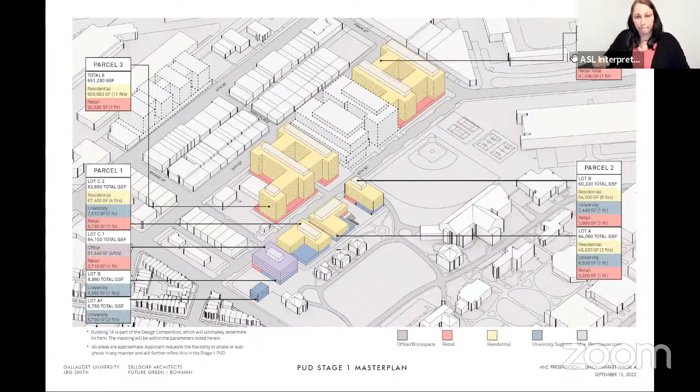There we go, perfect. So I just wanted to quickly remind everyone of all the community benefits and amenities package that was approved as part of our stage 1 PUD with full OP and ANC support. It's a pretty long list, so we'll just stick to the highlights. First and foremost, in terms of neighborhood development, the uses and benefits we're proposing for our project are all net new to the site and neighborhood.

We'll be providing approximately 60 units of affordable housing as part of the project, and the majority of those units are all at the 50% MFI level. We have executed a first source agreement with DOES, which will prioritize hiring local DC residents as part of the construction process. We have about 10,000 square feet of retail dedicated to the makerspace at a discount market rent, and additionally we'll have 5,000 square feet of retail dedicated to deaf or hard of hearing entrepreneurs.

One of the really big goals of the project is to enhance pedestrian safety along 6th Street. We'll do this by narrowing the right-of-way to slow traffic, installing a protected bike lane, and installing a tabletop crossing at Neal. Additionally, we'll provide about 65,000 square feet of open space, which will greatly improve the 6th Street experience, and in conjunction with DDOT we're going to help with traffic mitigation by installing new signaling and new traffic cameras.

Both our open space and streetscape improvements recently obtained second stage PUD approvals and are set to start construction in the new year. And then finally, as it relates to sustainability, our project will be LEED certified.

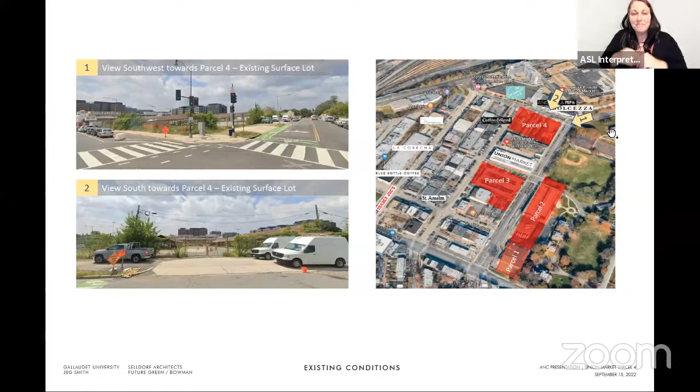Both Robbie and Nick had already spoken to the site context and where we are located. I think the unique attributes of our site relate to the context. We're bordered along one side by 5th Street, the historic wholesale retail spine, and on the opposite side, 6th Street, by the campus of Gallaudet University and Brentwood Hamilton Park — two very different sides of our site. We're located at the top of the hill of the Union Market District, along Penn Street.

The site, due to its location, has a large 15-foot plus change in elevation from Penn Street down south to the bottom of our site. So we'll show you how we've taken advantage of that in section.

Looking at some of our original massing ideas for the site, and how we refined the massing from what you saw earlier at the Stage 1 PUD — we oriented the bulk of our massing on an east-west axis along the site, working with the topography and also having the majority of units face south, optimizing for energy performance.

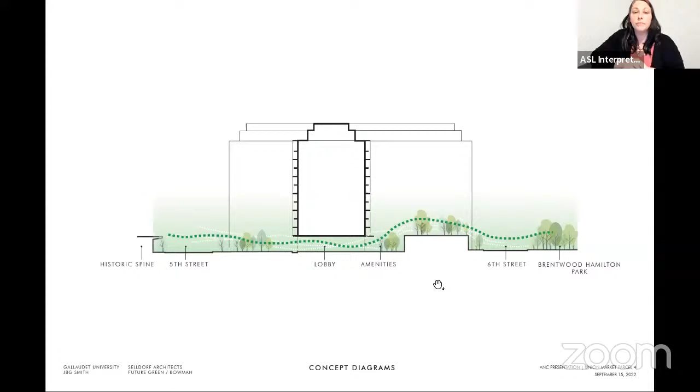Just to get back to the change in lot occupancy, the courtyard was not included in our stage 1. That's an example of some of the design refinement that we think benefits both the building and the public experience, a result of refinement over time. So the lot occupancy reduced with the introduction of the courtyard.

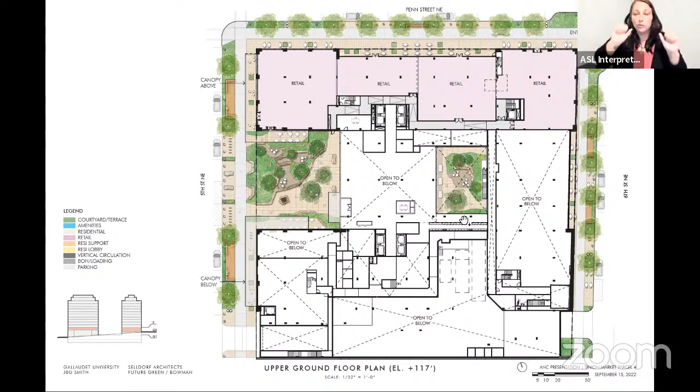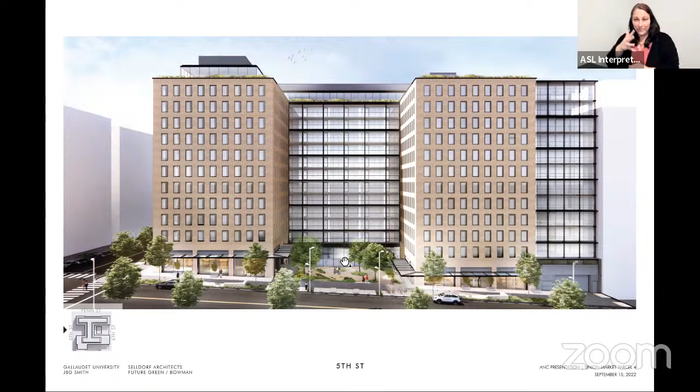So here we're hovering a little bit above, across the street from us on 5th Street, looking at the building directly. You can see here the entry plaza that I pointed out, the retail along 5th Street. We are introducing glazed and steel canopies, much inspired by the canopies across the street, that will run along 5th Street and wrap into the entry plaza. You can see here the lobby in the distance.

I think this view really sums up the massing, but also the articulation of materiality of the building to break down the massing. The building is made up of brick buildings with punched windows on essentially the corners of the site, connected with these more transparent glass and steel balconied facades.

I want to point out that this is not a curtain glazed, simple, straightforward glass facade. This is a layered facade that will start with very thin steel round columns that hold up the balconies. There will be railings and then a setback for the balconies of about 4 to 5 feet, and behind that, there'll be windows and doors for each of the apartment units.

You can see that here with this bridge building that bridges over the lobby and the sunken court on the other side. And also on the right-hand side, this infill building that sits over the parking entry.

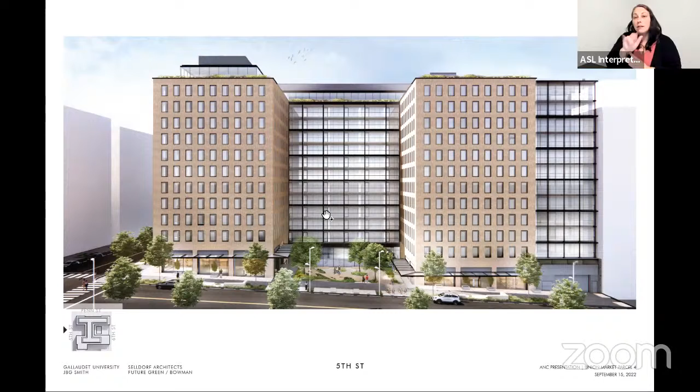We think using brick is contextual here with what we see in this post-industrial neighborhood and also on the campus. It's a material we like using, as you can see in other projects. The texture and longevity of the material is what we like, and also that it's contextual here. The punched openings in our building will be finely detailed with metal surrounds and metal sills, and the windows will be set back.

So there is relief in the shadow—it'll show shadow in the brick facade. We're in schematic design now, so we still have time to develop those details, but we've spent a lot of time on the details around the windows, the way the brick is laid, the selection of the brick, and how the brick terminates at the retail level and at the top of the building.

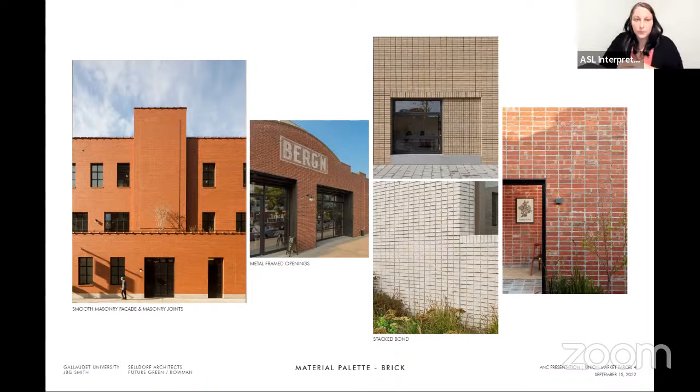Here are more buildings, in particular brick buildings, used in a contemporary way, and how we've articulated the openings around with the metal trim. We're very interested in using the brick in a unique pattern, which we're still exploring. We're excited to use a tan colored brick, maybe staying away from red brick, doing something unique and juxtaposing it with the darker metal window surrounds, window frames, and window sill details.

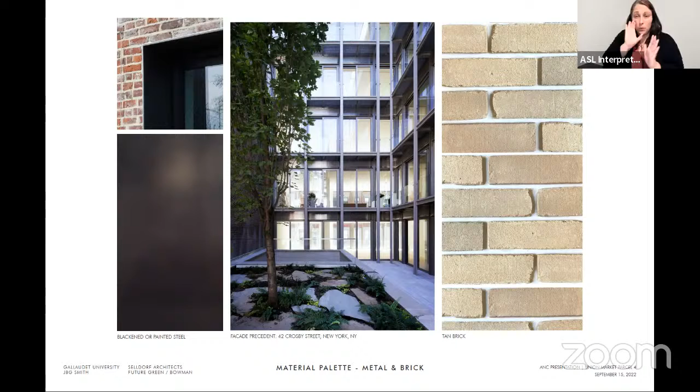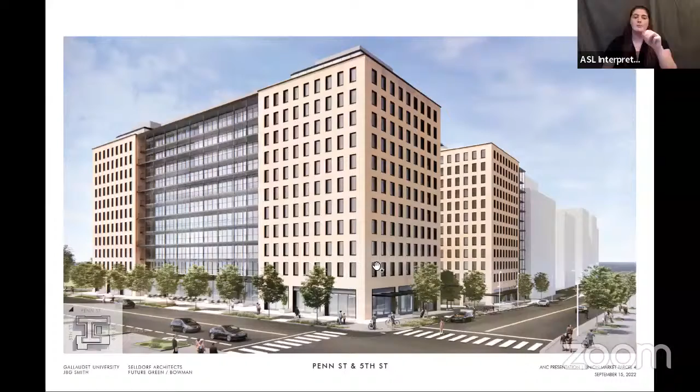The masonry is on the corners here, and to your point, maybe you're referring to this view—the masonry does wrap in all the way, a little deeper, when you go into this court here, and then the glass shows up again in the back, which is the opposite side of the glass you see from 5th Street. Does that help? Yeah, and that in a sense would extend to either side, and then you see it coming through on Penn. On this side we have that other glass infill building, and that wraps around. Yes, exactly. Thank you.

Shall we continue and jump into the landscape portion, or were there other questions? I have one more question.

Of course—the depth of the balconies. There's a new 3-story condo building next to mine with a balcony/fire escape egress at the back that's not very deep, maybe 4 feet, and I often wish it were deeper so it could be used as more living space. I have a 10-foot deep porch at the back of my house and we hang out there all the time—it's nice. Is there a zoning or technical restriction that prevents making those balconies slightly deeper, like 6 feet? I know you're going for a cleaner look and maybe don't want them extending too far out, but are there zoning or technical restrictions?

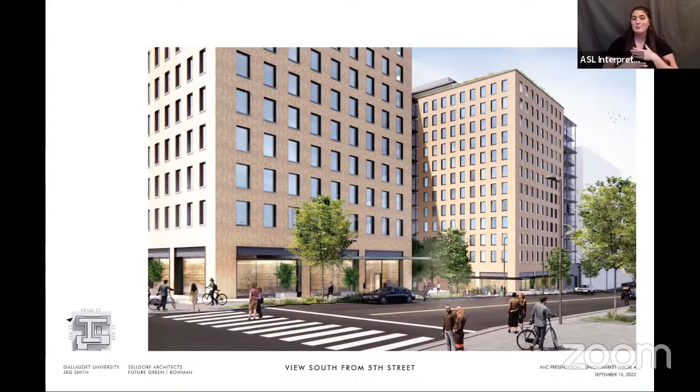I appreciate the answer, thank you so much. And I appreciate the context about how if you made them really deep, all you're doing is killing the light for the units below. I hadn't thought about that, but I appreciate that. Unless it becomes a terrace building, but if it's cantilevering over 10 feet, it will really darken the living rooms or bedrooms below, right? Yep.

I have a question real quick. The units with the balconies, so everyone won't have a balcony, it's just those that are set in with the glass. Are those the only units with balconies? That's correct, yes.

I know we had a discussion about this before, as far as the size of the units. Are the IZ units and the other units, market rate I guess if that's what you want to call them, are they all the same? Is there any difference in the size of those units compared to the regular units?

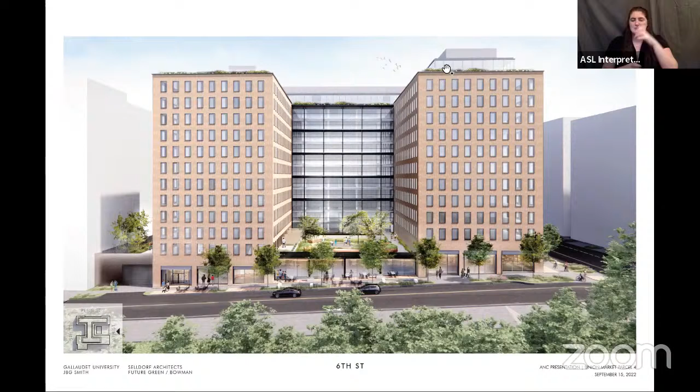Yeah, so the IZ units will have a similar distribution in terms of size and balconies as well. In addition to balconies, there are quite a few terrace units. You can actually see some here on the second floor terrace and at the penthouse. I don't want to misquote, but I think we're very high relative to most of our other developments in terms of private outdoor space for tenants. The IZ units will reflect that same ratio as market rate units, both in size and outdoor access.

Okay. Commissioner Rhodes: I will say I was actually happy to see one of the case exhibits give a map of the entire building indicating where every single IZ unit is located. I'll applaud them for doing that, because often we're asked just to accept a number without knowing, are you just shoving all the IZ units into the basement? They're actually showing, floor by floor, where the IZ units will be located, and I appreciate that.

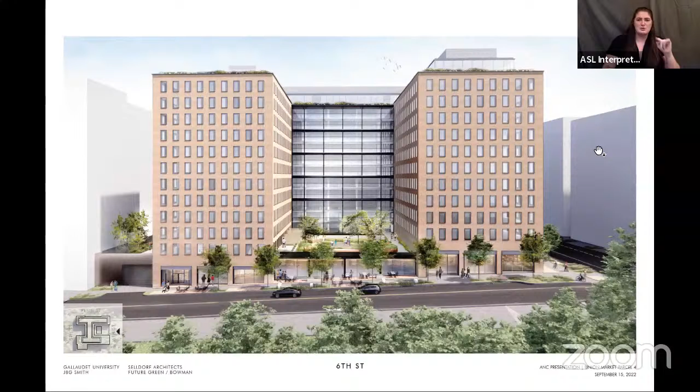Now, a question for the development team: does that then become fixed? After your second stage PUD is approved, can you afterwards change where those go? Technically, yes, because we have flexibility to move around partitions as design continues. However, the reviewer still will hold us to having the same ratio as the market rate units in terms of size, mix, and outdoor access. The interiors will be indistinguishable between the two types of units. We still have to pass all those check marks to get through the IZ program and be permitted.

Gotcha. And just to chime in, even though you can adjust the exact locations of the units during permitting, under IZ you can't put them wherever you want. You can't cram them all into one corner. They have to be evenly distributed across the building, and the zoning reviewer does look at that very closely. You can't just stick them all in one spot.

Great. Not that we would do that anyways. I hope not. You're protected.

Well, thanks for that clarification.

Sure, okay David, we'll let you take landscape. This is actually really great. I love the landscape of this project and how it's developed. Thanks, Robbie.

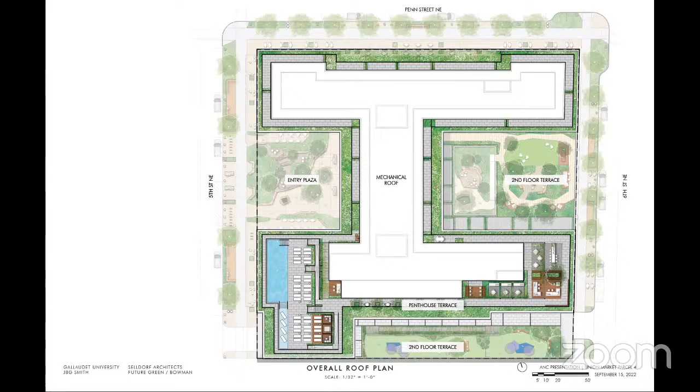Yeah, no, it's a good point. I'm afraid it might become largely ramp in that whole space, but it's certainly something we could look at and see if it's feasible. What I was thinking is it looks like you had that sort of trapezoidal thing in the lower part - if you wrapped it around there, coming down around this little thing here, and had a gradual ramp with exits off, you would probably have enough space to wrap it up. Do you get what I'm getting at? Yeah, I would have to study it to see if it's feasible. To be honest Skip, I love your intention, but it seems like it would be a real challenge to accomplish a ramp, but certainly something we could look at.

Yeah, I'm conscious of that - what I do for a living is accessibility related stuff. Absolutely, so I'm just throwing that out there as something to look into. Absolutely, I think it would be a nice thing for the people using the space, or you have people with baby strollers.

Sure, David and Skip, as somebody who has a new addition to my life, and I'm constantly - is that Skip speaking? I'm sorry. It was. Go ahead, I'm done. It was, yes.

Sorry, I couldn't see who was speaking on the screen, so I wanted to make sure I was addressing you correctly.

The floor to floor height change there is almost 20 feet, so it's a significant amount of ramp that would be required. What isn't shown in the landscape plan are the intermediary plans and the proximity of how close the elevators are, right here, and then we have entrances and exits right onto the terraces. Not to say David's team isn't creative in how they can address landscape, and we should look at it, but I wanted to put that 20-foot, 19-foot figure out to you, because I think you'll understand what that means.

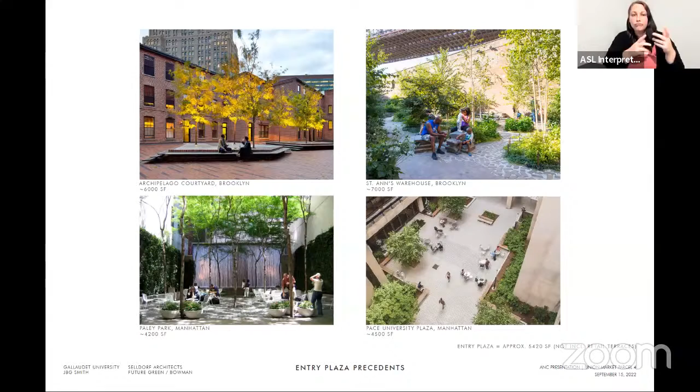And with the next slide, Oliver, we've been working on this project for over 7 years, and back in 2015 we distilled the Gallaudet DeafSpace Design Guidelines into a series of working guidelines for ourselves as we approach the public space. These are still very present in our mind as we're considering the public realm.

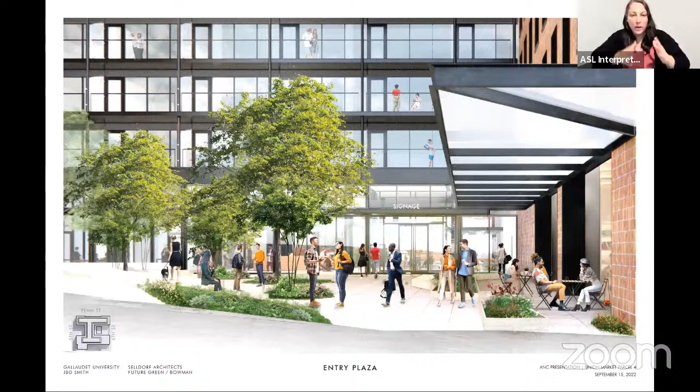This is the view from Fifth Street looking in, with the retail terrace bump out on the right, and landforms on the left beginning to feather into a natural stone material that terraces down, creating a distinctive feature. We're anticipating using multi-stem trees for visual interest, with four-seasonal landscapes that weave in an orchestration of plants throughout the year and build in evergreen structure, so it feels lush year-round. Look forward to your thoughts and feedback.

One. Yep, just making sure I wasn't muted. One. Oh well, couple thoughts.

With the landform and landscaping, which I do appreciate, just a thought to keep in mind: there is a skate park there currently, and you will probably be fighting that, or it doesn't seem like you're embracing it. So just so you know. Good to know, good to know. Yeah, it was a skate goal that was actually moved a year ago, so maybe the time will help us out there. That's a really good point though, I totally forgot about that link, and some material selection we could be smart about.

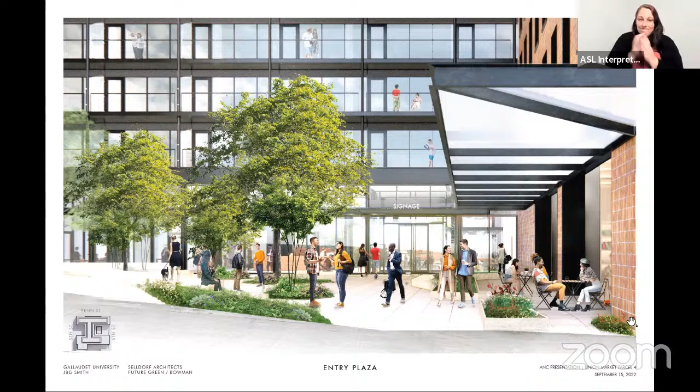Yeah, I think that's a good point. What's not shown here is that the two retail terraces are at different levels, and the one on the north is much higher, which I think is kind of cool and interesting. And I think the solar aspect is better in the winter as well, so that's something to consider.

I agree, I think there needs to be some activation to draw people up here, but a meaningful public space in this neighborhood might be the thing to do it. It's really something that's lacking—people are pining for a little bit more of that lush green. It's such a concrete-heavy neighborhood that I hope that's something that brings them here, and obviously the retail is a driver as well.

I think just to add—sorry, go ahead. No, go ahead. Just real quick, I was going to say the right type of retail teamed up with this space could be part of that. And just to point out, this came up in the meeting the other day: we did a bunch of sun studies, looked at summer and winter, and that's one of the details we're looking at with the canopies, using glass or something translucent so that even under the canopy you'll still get light through when the sun comes around, and it's not overshaded.

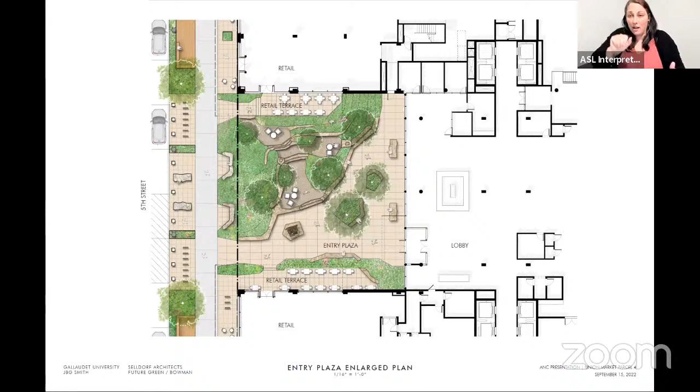We don't know. Currently that's where the Angelika pop-up is, on that strip on 4th Street. There's Dolcezza on Penn, between 5th and 6th, and Angelika's right next to it. Songbird is up there too, and the movie theater. There's a hotel up there now too, Selena. That's not on this block though. Anyway, let's not get bogged down on where Angelika is located - Edens owns all of this and they're presenting later tonight, so you can ask them about the context of what they're planning to do there.

I was just thinking that what would activate the northern part of your complex would be essentially what's across the street in both directions from it. So I think ultimately it'll be double-sided retail there, and that's the vision for Penn Street, I think, from everyone that owns property.

I have a question - you mentioned bike racks. Are those the bike share racks or bike racks for the residents for their personal bikes?

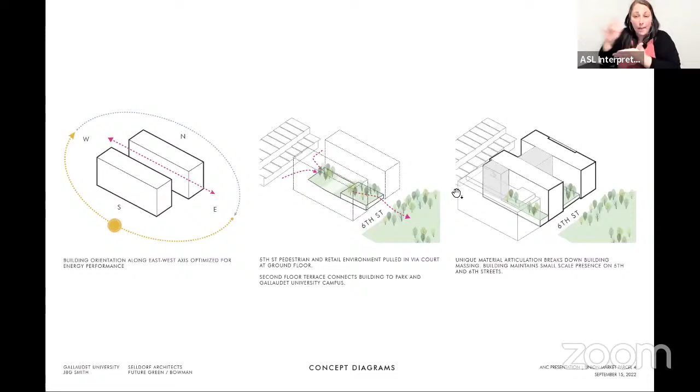These are for the residents, but we're delivering a Capital Bikeshare station as part of our other parcel, parcel 2, just to the south. So there will be a capital bike share station as part of the project, but more central. So, say for instance, if they have a personal bike and they don't want to park it outdoors, is there any way they can store them inside, like any racks that will be inside?

Yes, for personal bikes. So on this 6th Street entrance here, the secondary entrance, alongside the bike lanes that will be introduced on 6th Street, there's an entrance, and you can go down to the floor below, and there's a large bike room there with racks.

As part of the project just due south, where you are putting in the capital bike share, how many bikes? I know they come in modular chunks - it's the modular chunk that DDOT has. I don't know if this is the one night we told them they didn't have to join us, and we got a question they could answer. I don't know, David, if you recall how many bikes are on that. I wish I did. I'm sorry, I don't know - we can get back to you on that answer.

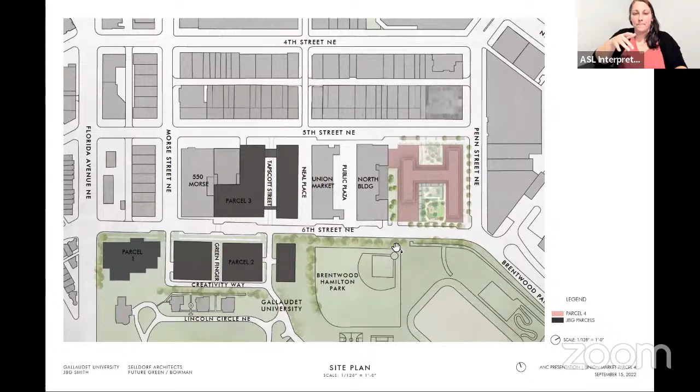One question I had was, there's a lot of really tall buildings now in the Union Market area, and a lot of them do different tricks where they undulate. My one concern is, if there was a worm's eye view of a person standing on Penn looking up, it's a very imposing structure.

But I guess that's the concept of it. Was there anything you guys had considered to make it, I don't know, more complicated?

I guess I just worry - maybe not to make it smaller, but maybe to make it look smaller. Like on H Street, there's been several large buildings where they changed it to make them look like it wasn't just one large massive building. I know you've kind of done that already by breaking up the building into glass sections and concrete sections.

We might all want to say the same thing, but I was going to say the setback of the glass building being 6 feet back also sets back the penthouse, and it sort of creates a slight cascade there.

I hope I'm saying that right. You mean at the penthouse where it tiers and sets back? Yes, the building - the penthouse does that, but the glass portion is also set back, like along Penn, for example. I think that helps - not only is it a material change, but it's further set back from the street.

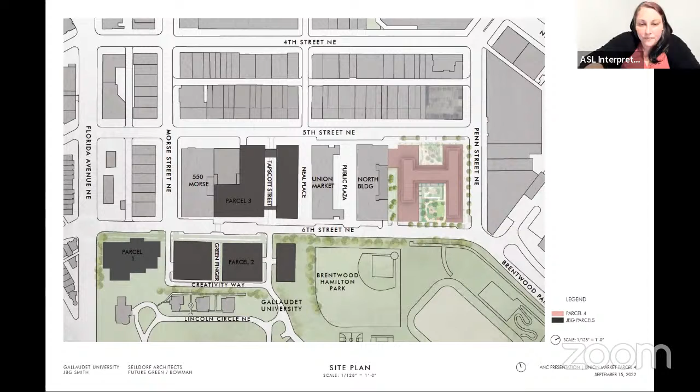Right. Could the person with the slides go back to those renderings? I think it was - sure. So we understand, so I can understand, Marsha. Yes, these ones here. I'll just see how I interpret, but I think on this side, as you said, these are square in plan, actually, right? These are almost 74 by 74, something like that.

And then you have the glass. And then when you move around the building, as you pointed out, you see the square here and here. I think where you're saying then we continue the brick in is here - so the brick goes in further than it does on the outside.

I would say one of the reasons, and you can see from our precedent images, that we like to keep things as uncomplicated as possible so that the materiality, the proportions, and the detailing shine through. And you'll notice that inherent in our designs, we use very few angles and curves, although we're starting to explore them. But even with this view...

I completely agree that the logic of the corners would imply that the glass comes forward here, right, in the plan. And I think that would, in a way, create a very nice partie, a footprint. But I'm concerned that when you look in, the building gets a little overcomplicated with the glass wrapping and then coming out towards you.

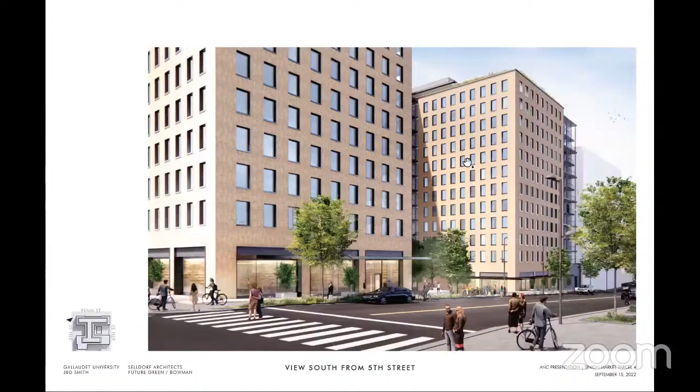I do want to point out on Penn Street, as this image shows, the glass facade that interrupts the brick does continue all the way and then identify the brick corner. This exact same thing happens on the south side of the building, which unfortunately is hard to see. When you look in here, that glass facade does come all the way forward, matches the Penn Street side, and you'll have that glass corner there. So when you come up here, you'll see the brick stop and then the glass start. Does that make sense? This side of the building is very much like the Penn Street side. It's only here that the brick does extend in and make the brick building a little bit longer.

There's something about how it interacts with the bridge, if you will, this way. But it does look like you just lose the purity of your original design. Well, I don't know if it's your original parti, but it's what shows up on the other corners.

So I think we'll follow up with that chart, the slide on the units and the capital bike share count from our other parcel. Is there any other further info you'd like as we continue through the process? We'll certainly go back to the larger ANC and keep you guys apprised as we progress.

It would be handy to know, for instance, you earlier said the average square footage is 700 square feet. If you could create a table for the ANC so they understand the average square footage of the 3 bedrooms, the 2 bedrooms, 1 bedroom, junior one, down to however many different types of units you have, just give an estimate of what the average square footage is, so people understand what's going in there. That would be helpful. I'm trying to think what other questions we had.

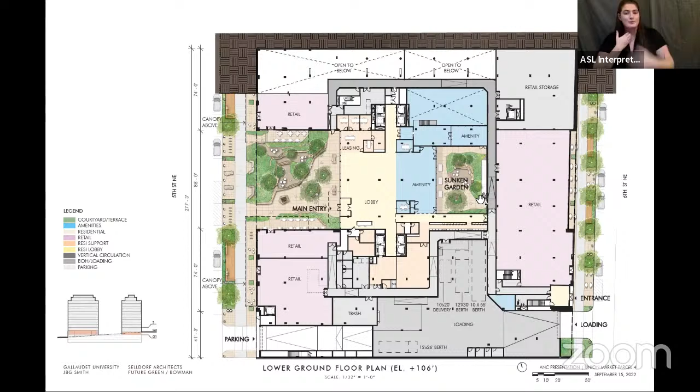This has been actually very, very helpful, and I appreciate your time explaining the design to us and the community. I know some of the other ANC commissioners will probably end up rewatching this video on the YouTube link, because you guys got into some more detail on the design and amenities in this versus a Tuesday meeting, so we really do appreciate it.

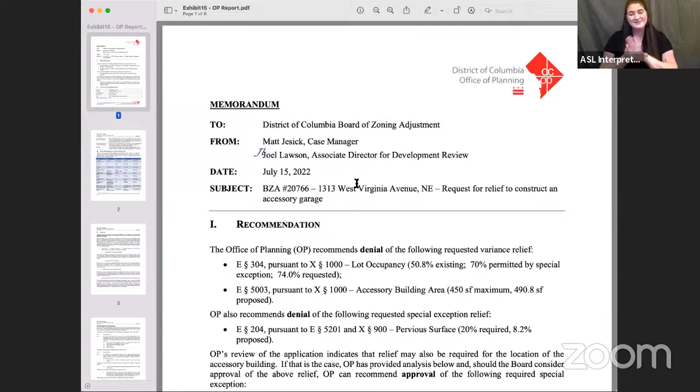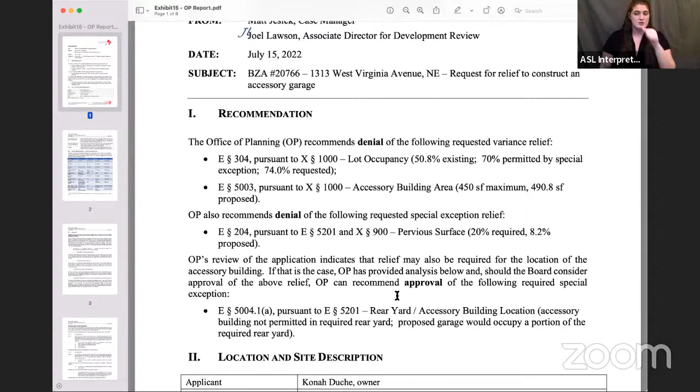Thanks, Skip. All right, you see this, this is the report from their case record - denial. So they have an existing 50.8% lot occupancy, and they were asking for 74%. They also recommended denial for pervious surface. Let me share my whole screen if I can do this. Basically, the way I'm reading that, their objection is because too much of the surface is going to be covered.

Yes, and that's actually what they were proposing - let me see if I can share my entire screen here. Considering the amount of flooding that's been happening in the city, that's a very valid concern. And once they build a garage in the back of the house, there's nothing stopping them from eventually putting another story on it.

I mean, they're basically trying to occupy a huge portion of the lot. It's very much out of character. The way I looked at it, almost the entire lot would be taken up by structures of one form or another, porches and whatnot. It was basically a row house and then a back deck, which almost immediately attaches to the garage. There wasn't much not covered, which means there'd be no absorption, no way for water to get to ground.

I thought it was a full garage? I thought when we looked at it, it was more open than that, but maybe I misremembered, two-car or maybe it changed. At least the original plan was essentially a two-car garage. There was a utility pole in the way that would have to be removed. Well, maybe I'm thinking of something else.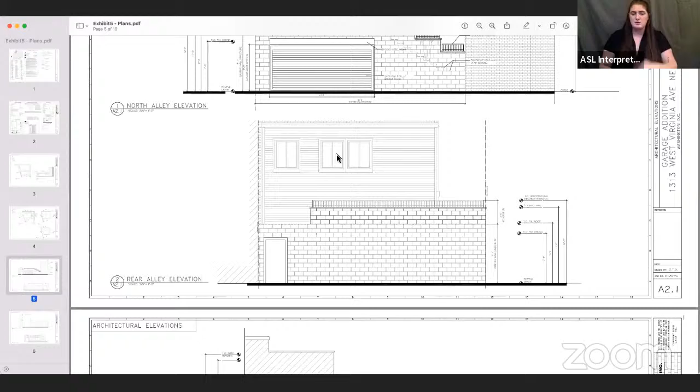Here are the plans. Let me see if I can find this one. I don't think I saw this one, I was thinking of a different one. Let me see if I can find the survey of the whole house. That's what I should show, the whole house survey plat.

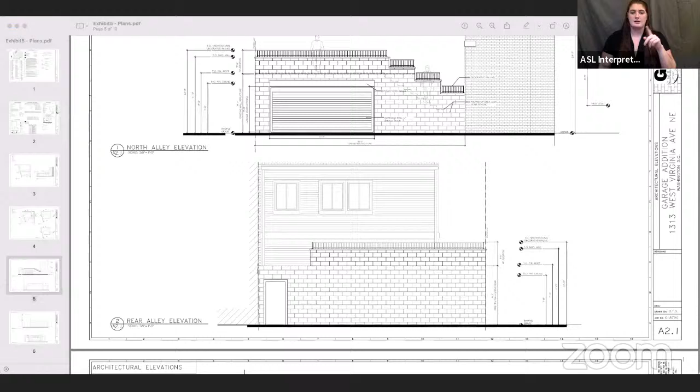Yeah, they're going to put a deck, and then there's your second story you were just talking about. No, I guess that's the current house, actually. Let me see if I can show the whole survey plat. That's the handy thing right there.

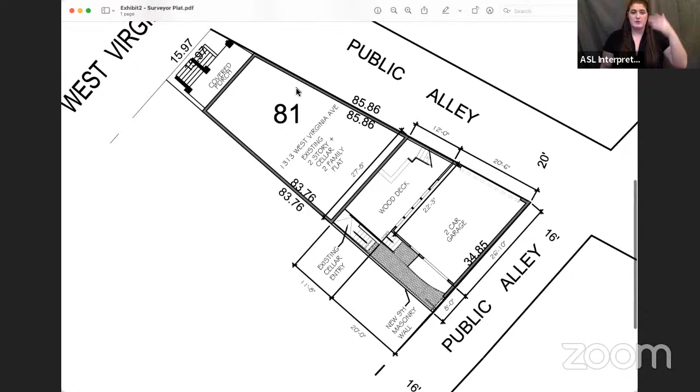Okay, so this is the survey of the proposed. So you've got a lot line, front porch here, this is West Virginia Ave. There's the existing house, they would have a wooden deck, and then there was a two-car garage right here. So there was going to be a pretty small area, which looks like it's paved too, I might add. Yeah, I assume they would have pervious pavement, brick or something, but yes.

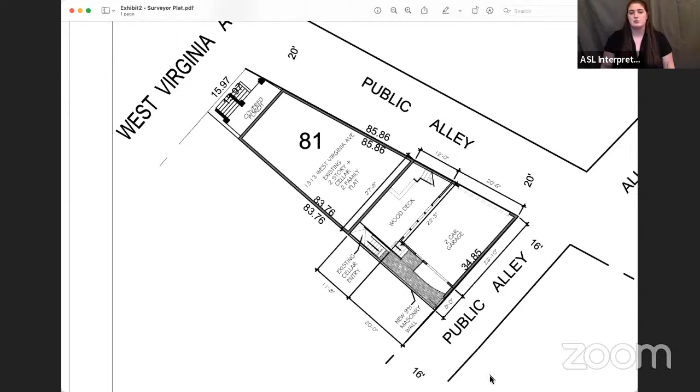So then, even if that's all pervious paving, it's not even close to what OP is looking for. No, it's not. And Kevin's right, just the way the thing was presented, I could easily see the deck that's above the garage becoming a guest house or something, with a deck above that eventually.

Eventually, yeah. So anyway, they have a BZA hearing that's been postponed till 12/14. So I think the ANC needs to most likely vote on a motion next month, so that's submitted to the case record, so they have it on the record, because right now the ANC has not submitted, has not voted, hasn't taken a stand on the issue. Generally speaking, if OP doesn't like it, it's not going to fly, but it would still be appropriate for the ANC to weigh in. So, Commissioner Rhodes.